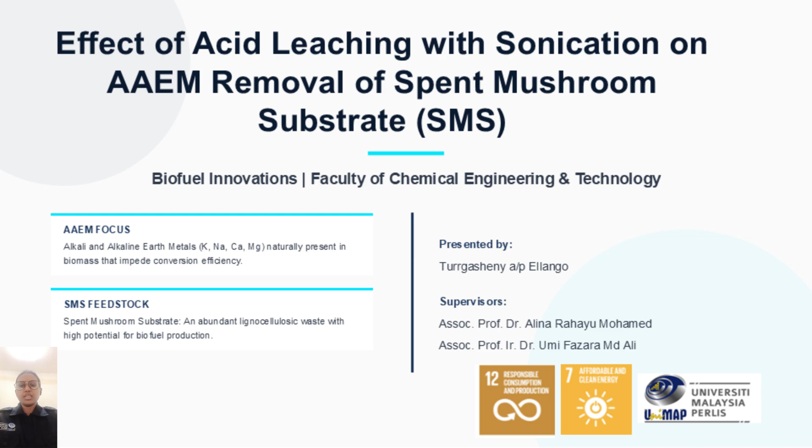Today I'll be presenting my research on the effect of acid leaching with sonication on AAEM removal of spent mushroom substrate under the biofuel innovation, which is supervised under Faculty of Chemical Engineering and Technology. This work is supervised by Associate Professor Dr. Alina Rahayu Mohamed and Associate Professor Ir. Dr. Umi Fazara Md Ali.

Alkali and alkaline earth metals or AAEM such as potassium, sodium, calcium and magnesium are naturally present in biomass. These elements originate from soil, fertilizers and biological uptake during plant growth. However, they negatively impact thermochemical conversion processes like pyrolysis and gasification.

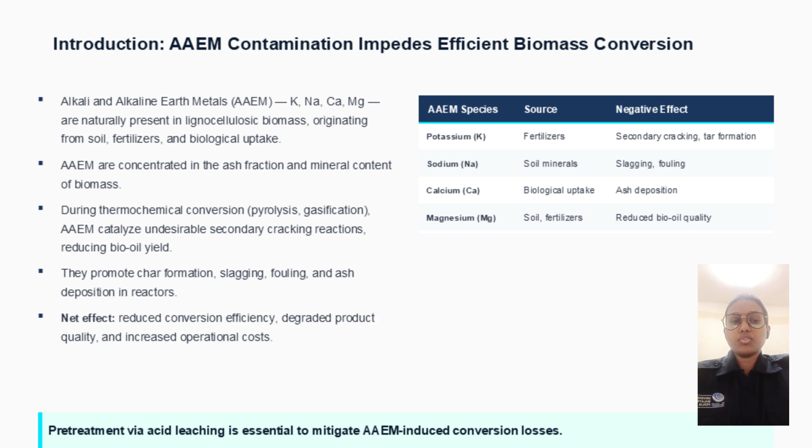Specifically, AAEMs catalyze unwanted secondary cracking reactions, reduce bio-oil yield, and promote issues such as slagging, fouling, and ash deposition. Overall, their presence reduces conversion efficiency, increases operational cost, and lowers product quality.

Spent mushroom substrate or SMS is an abundant lignocellulosic waste with high potential for biofuel production. However, it contains high AAEM content with ash content reaching up to 17.37% in raw form. This leads to poor biofuel conversion performance. To address this, acid leaching combined with sonication is proposed.

In this method, nitric acid converts AAEMs into soluble salt while the sonication wave enhances acid penetration into the biomass structure, improving mineral removal efficiency. The main objective of this study is to determine the optimal sonication duration that maximizes AAEM removal while improving the physicochemical and thermochemical properties of SMS biomass.

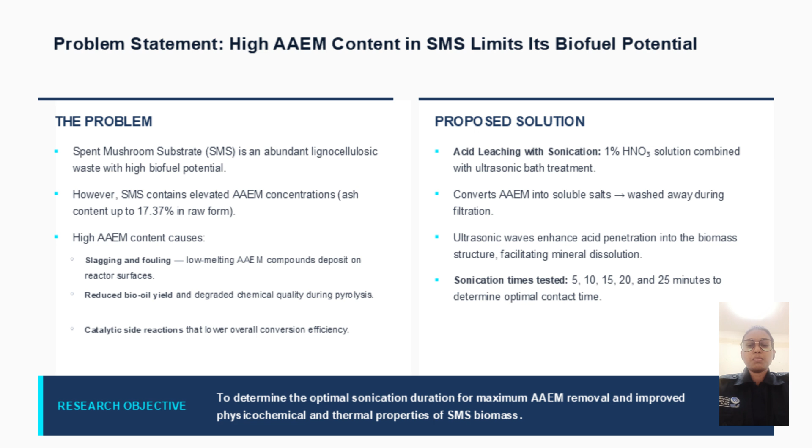The methodology consists of several stages. First, the biomass was collected, cleaned and dried. Then it was ground and sieved with multiple sizes, but we did choose 250 micron for proximate analysis and TGA analysis. Proximate analysis was conducted using TGA.

Next, acid leaching was performed using 1% of nitric acid combined with sonication for 5, 10, 15, 20 and 25 minutes. Finally, thermal and kinetic analysis were carried out to evaluate decomposition behavior and activation energy.

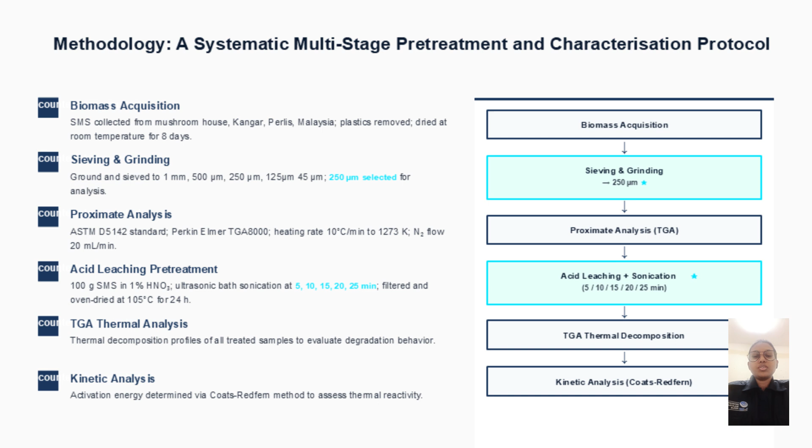The result of proximate analysis showed that the sample treated with 20 minutes of sonication, known as SMS-20, achieved the best performance. The ash content was reduced significantly from 17.37% to 5.43%, which corresponds to a 68.7% reduction.

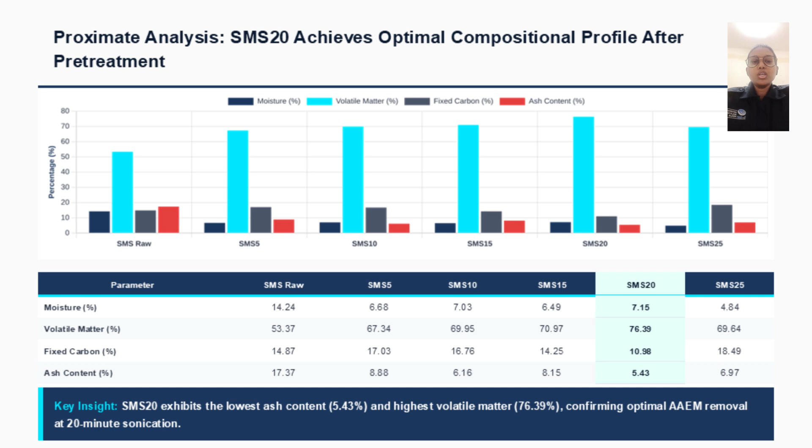At the same time, the volatile matter increased by 43.1%, which is beneficial for improving bio-oil yield during pyrolysis. The result confirms that 20 minutes is the optimal sonication time. Shorter durations result in incomplete AAEM removal, while longer durations do not show significant improvement. Therefore, SMS-20 provides the best balance between efficiency and effectiveness.

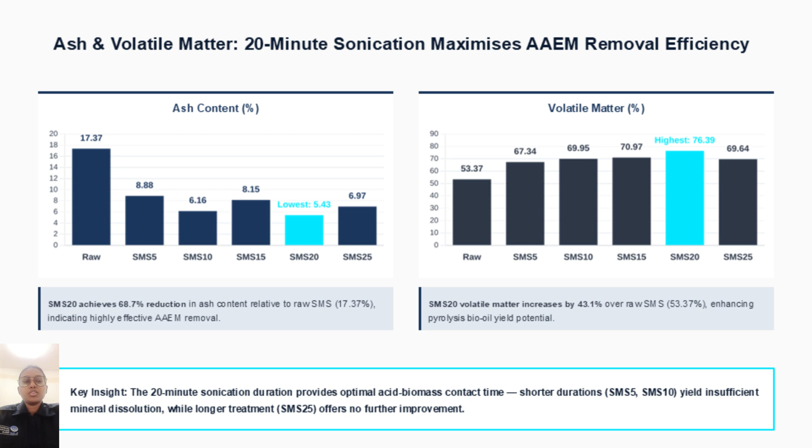The thermogravimetric analysis shows a well-defined multi-stage decomposition behavior. The first stage, below 150 degrees Celsius, represents moisture evaporation. The second stage, between 200 and 300 degrees Celsius, corresponds to hemicellulose decomposition.

The third stage, between 300 to 400 degrees Celsius, shows major mass loss due to cellulose decomposition. Finally, lignin decomposes slowly above 400 degrees Celsius. This clear profile indicates improved structural uniformity after pretreatment.

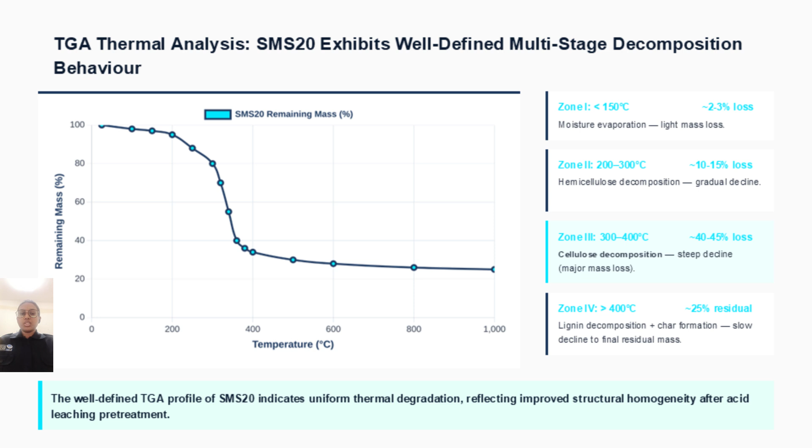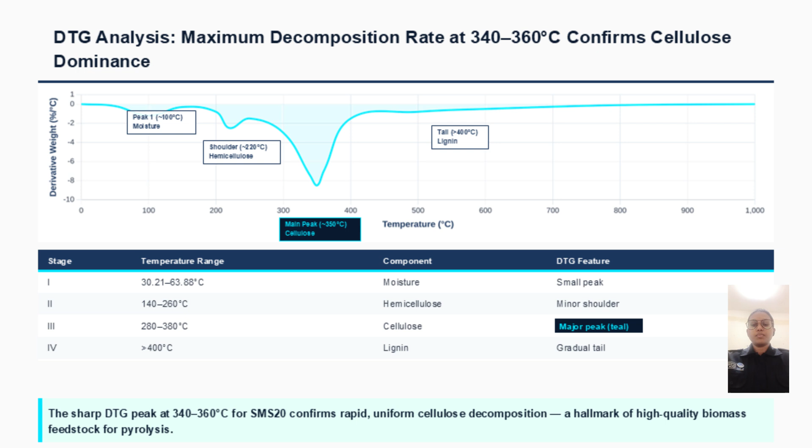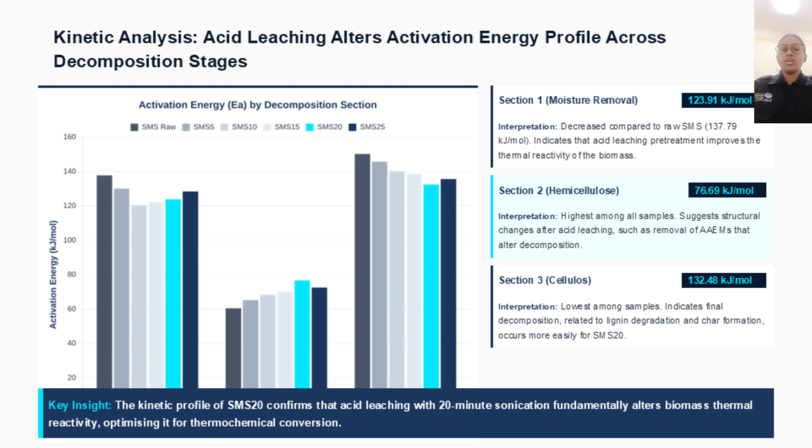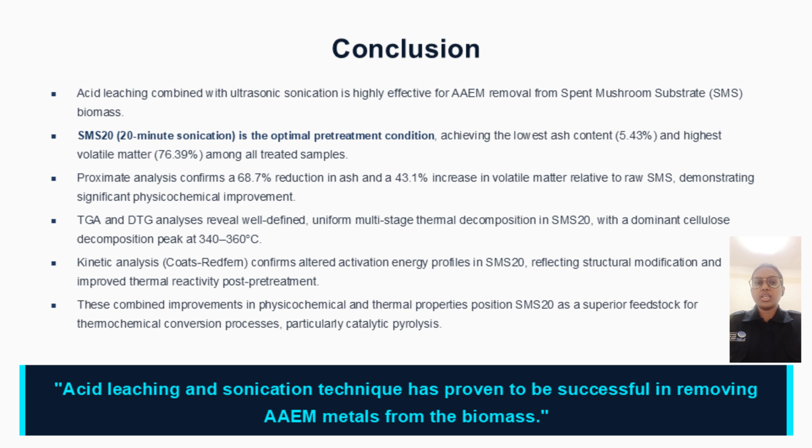In conclusion, acid leaching combined with sonication is highly effective in removing alkali and alkaline earth metals from SMS biomass, which are known as AAEMs. The optimal condition is 20 minutes of sonication, which significantly reduces ash content. Meanwhile, it increases the volatile matter.